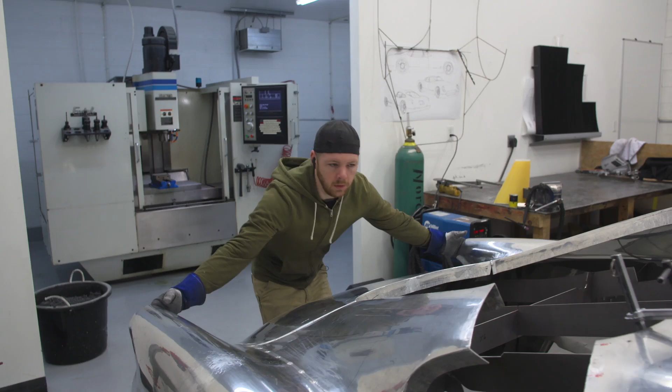Oh, this is heavier than I thought. Is this made out of aluminum? As soon as we're done with the car, we're gonna take it to Mars. Looks like you've been to Mars.

Putting in the transmission. Normally you'd think the transmission goes in the front, but this one goes in the back. Next level stuff, I have to change my hairstyle. Yeah, you might have to get a haircut.

Not so much telling the metal it's gonna move, as suggesting it move and it listening. Yeah, I like that. One more step closer to the ultimate car. Mind blown, 101. Wow, masterpiece.

This has been a dream well before I was in business. It's gonna take a team, everybody's expertise, everybody's input. These cars cannot be displayed, promoted, or seen by the public until they arrive at Detroit Autorama. There's only so many teams that have put these cars together, so it's a great, great, great opportunity. We'll build a car that nobody has ever seen before. The goal is to build a Ridler.

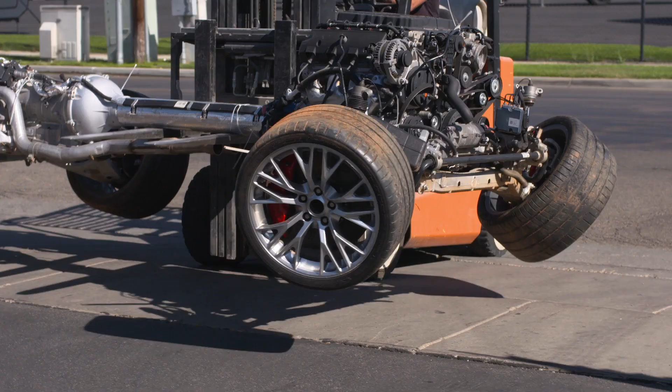Hell yeah! We're gonna use this transaxle out of this 2017 Corvette as the jump-off point for the transmission. Lots of amazing engineering in this deal. We don't really know what we're looking at yet.

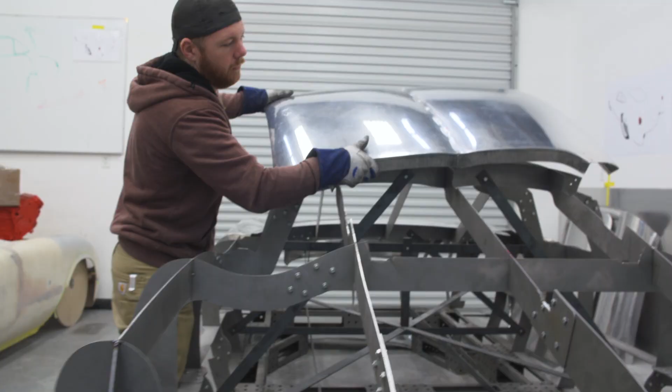You can see it's just a process. The shape will get there. It takes a minute, or an hour, or two. I don't know if I'm nervous, or just we're being overly cautious. I don't know, seems like that big irreversible step.

Fitting pretty decent, first two pieces tacked together. We're just gonna start standing things up and making our best shot of it, and we'll go from there.

This is kind of cool. It's really cool, isn't it? Uh-huh, it's like we're gonna go to Mars. Looks like you've been to Mars.

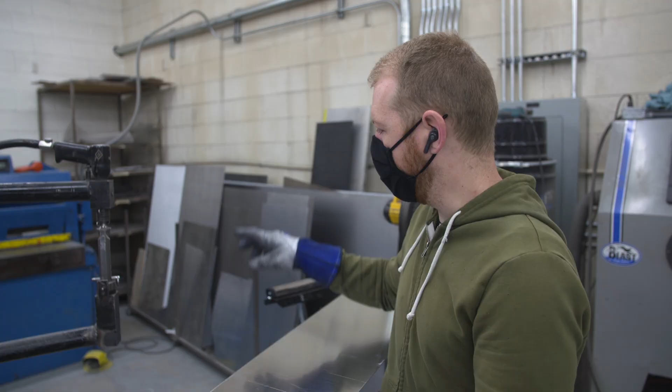This is the start of the rocker pieces. So I just need to get a general curve in the profile of it, and then I can start chasing tipping edges and defining door openings and stuff like that.

Rubber band on the top to try to make a soft upper wheel, so hopefully I can just kind of roll it through here and get the profile I'm after and not stretch it.

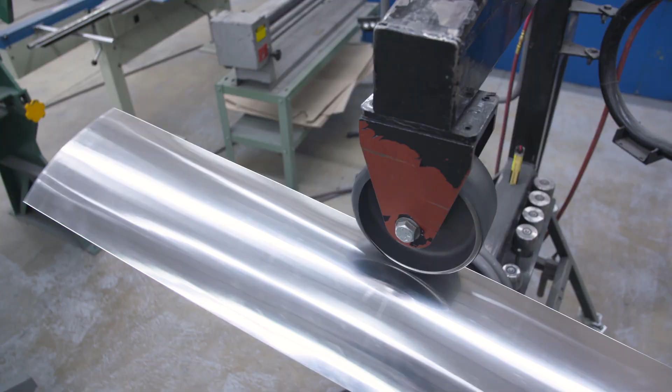I think it's the right profile. I just gotta make it do this number now, just ever so slightly.

The start of something good.

Seeing all three parts come together all at the same time, all on one table, is super exciting to me.

This is part of the floor. I'm gonna roll these edges up a little bit, get a nice half radius to meet up with the wheel tub so that everything will be nice and flowy.

Let's see if I can get it done in 2 passes. It might take a third.

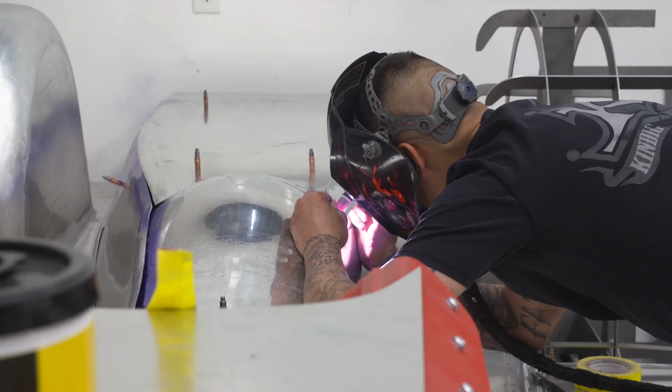We're getting the tunnel finally squared away on the rear. Eric's got the side pieces all dialed in, so I'm cutting them back and tacking them together so I get this all as one piece, and he's flowing all the floor into the front, so it's all coming together pretty good.

When we came down to the point where we were trying to join the lower panel, the lower skin with the body, and we didn't want things to move, it was a little bit of a quandary, like, how are we gonna get to this? How are we gonna do it?

Okay, ready? Yep, all right, heave ho. Oh, this is heavier than I thought. Is this made out of aluminum? Well, and it was a huge milestone because getting those 3 pieces together, I mean, it was a long road up to that point.

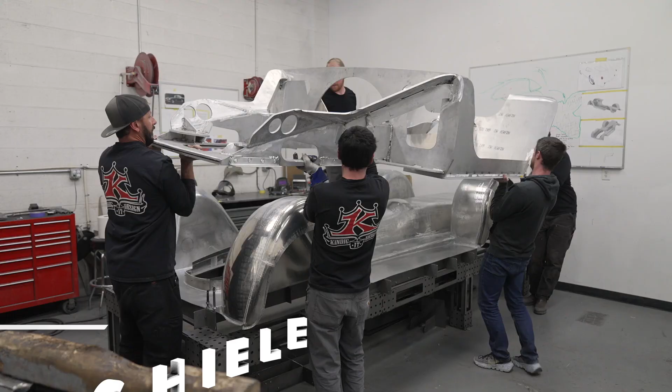I think you're gonna want to come up here, Max. Slowly, work quickly... better, don't catch your fingers. Good? Everyone clear? Good, good. Yeah, good, like a glove? It's glove, yeah, his glove like a glove. His glove was stuck underneath the... Is it just your glove? Okay.

Is the next one lighter or heavier? Way lighter, 'cause I'm spent, dude.

So that one will go on to the back, and then it kind of has to do this number. So like up high in the front, and then you'll set the back and we'll kind of bring it down? Yeah.

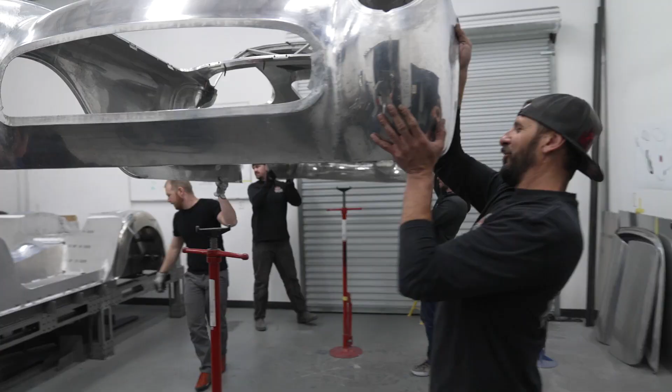Okay, there we go, oh yeah, that's way better. Okay, go slow so we don't crush Jordan. Oh yeah, I could hang out with this for a while. Okay, and then we got the back. We might have to spread its legs right here. Gotta spread the rockers, Greg.

We good? Yep. Sound first, that's good. Like a glove, bruh. Dude, that's amazing.

Yeah, look at this masterpiece. For the very first time, it's a car with a chassis on a floor. Can you believe that I thought this up and we made this?

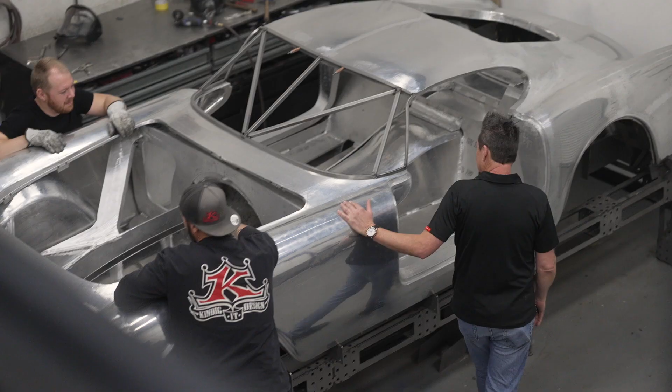You're just amazing. I was about to compliment you, but you beat me to it. Looks great, Jordan. Isn't it cool?

Yeah, this is awesome. It's funny to see this stuff going together over so much time, in big chunks, but when you see it all together, it's breathtaking, seeing the belly pan section, the structure going in the center of it, and then the body actually setting over the top of it.

Now I'm getting chills. Now I can start to really see the car come to life. You look over there, that's what this car started as - flat sheets. And now it's this beautiful masterpiece that I designed.

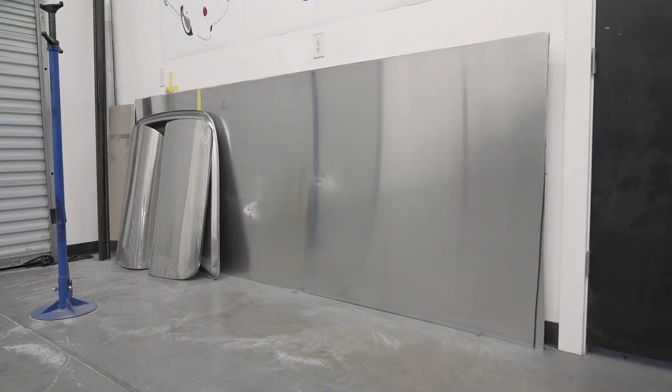Well done. Save your phone, the crap's getting deep in here. Now we have this body.

Right, it's beautiful, and it's a milestone, a huge achievement, but it's like, okay, we still have to figure out how the doors are gonna swing. How are they gonna latch? Is there anything else we're not thinking of before we weld the body to the floor itself?

The body is incredibly light and easy to put on. The frame is heavy, so I would rather him just weld it to the floor so I don't have to pick it up ever again.

The sooner we have the big chunks going together and they don't come back apart, that means we're getting closer to the finish line. I would really love to see this car debut when we're hoping. But I think you're doing great, I think this is awesome.

Like, this is exciting, I want to be in the moment and enjoy it, but it's like, okay, we still have to move on. And then it just opened up another list of all the other things we need to do to accomplish this. I'm gonna get out of your way, let's keep going, it looks amazing.

This car is 10 steps above anything we've ever built, period. Masterpiece.

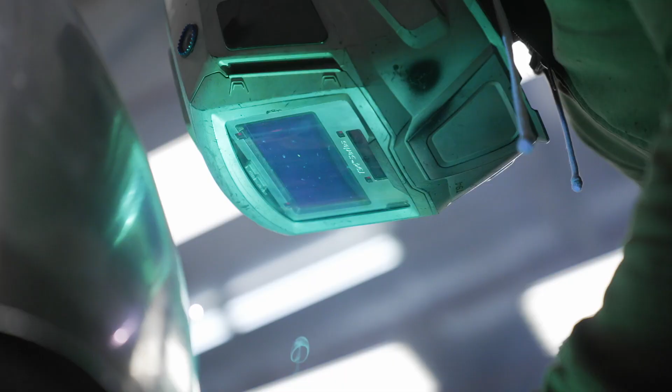We're welding the chassis to the floor. This will mostly be stitch welds, a little bit here and there. I don't want to do a good foot-long weld - it's just going to shrink all over the place if I do that. I'll try to make sure the tabs are very, very tight to the floor when I weld it.

This is the point of no return. No adjustment after this.

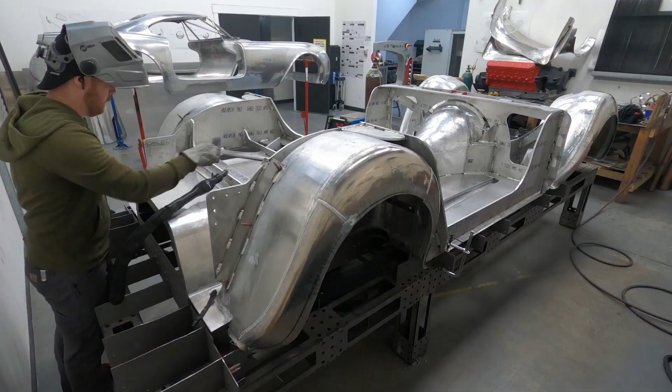So now that we have the floor and the body ready to attach, we don't have the real engine yet, because we have a printed version - it's custom. So you're thinking that's not going to come out the bottom? I'm hesitant, but we'll see. We have the mock-up plastic version, so we can build the whole engine bay out.

It has great fit on the computer. Yeah, it's gonna have to make sure we got real world space.

This will dictate what we're going to see in the future with the aluminum block. If this doesn't come out now, this will tell us, do we have to take the heads off to get it in and out?

Not only is it the engine, but it's the whole torque tube and the entire transmission - it's the entire drivetrain. The body was level, and it has to drop at such an angle that we have to take it out. All of a sudden, everything is going to have to be 10 foot off the ground, or we're going to have to lift the body this way so that we can get it apart.

I'm hoping it doesn't have to see that kind of angle, but it's going to have to see a bit. Okay, let's see. All right.

It's going to be really easy with this plastic one. I don't think I'm going to be able to bench press the aluminum block in no time. We'll get under there, get ready to catch it. I'll catch it with my face.

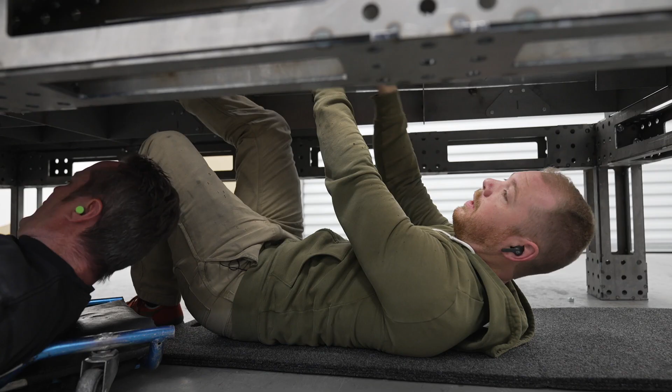You want me to knock that bolt out? Got it? Got it. Okay, there's the passenger side one. Alrighty, let's see.

We'll get under there, get ready to catch it. I'll catch it with my face. Alrighty, let's see.

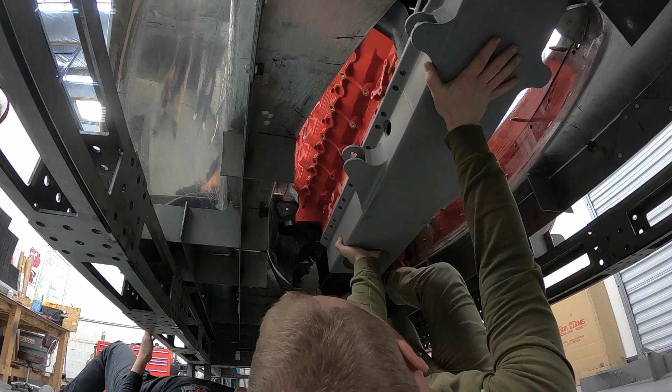It's mainly this valve cover. All right, go take the valve covers off. So far we have to take the valve covers off, which is easy, that's not a problem. What about the other side?

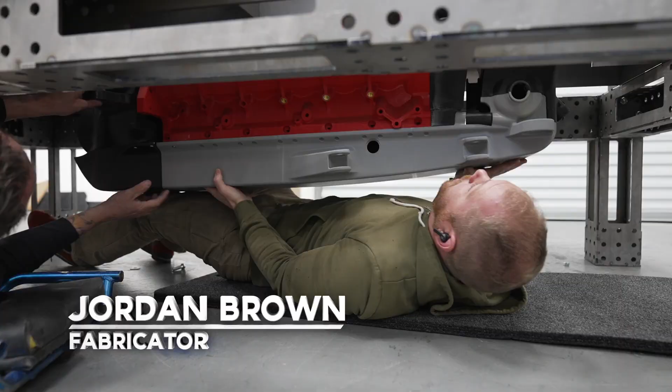No, okay, coming down. Yeah, see, all the rest of it's fine. That wasn't bad. Set it back up in there like it's going back in. What angle do we have to get to? It didn't seem that extreme, really.

Okay, right there, about that angle, which is pretty decent, like 20 degrees, it's definitely doable on a lift with something that we can adjust the angle of the trans drivetrain. Jacks will be really helpful. The torque tube and the bell housing, all that stuff's going to already be attached to the engine.

So where you're trying to go in at an angle, you're not going in from the top like a regular engine would be. No, you're going to basically go from the bottom. Okay, want me to hand it to you? I don't know that it'll tilt enough.

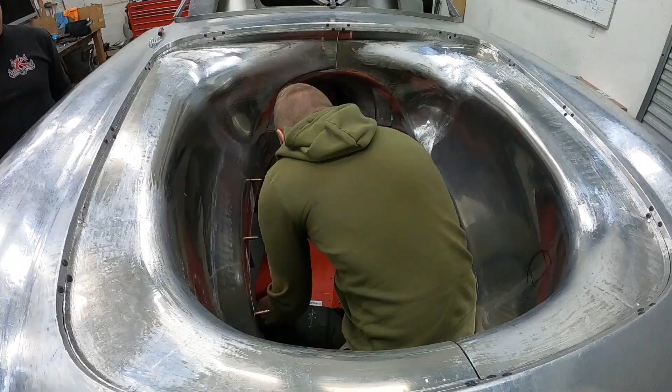We've done all the math, and it really should be simple. It's gonna be simple, stay tuned. Yeah, it ain't gonna come out this way. It's taller than our 18-inch stands.

There you go, you're gonna have to be way more careful with Dave's paint, you know that. Stupid paint, let's polish it.

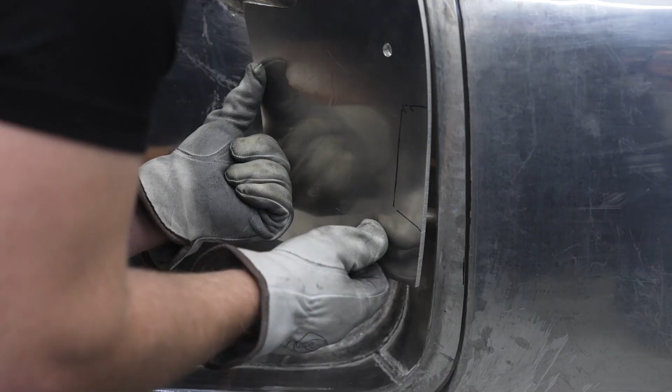We're taking the door off so we can clearance the front edge of the door shell and then get it swinging. Proof of concept, we like where the hinge is. I've had a lot of ideas, not just using a standard door hinge, but designing a constant radius and a very small porthole where it comes in and out of the body, so that's trick. This is the structure for mounting the door hinge to the rest of the shell.

Once this guy is tacked onto the shell, we can swing the whole thing as if the actual door was here. All right, moment of truth. Hopefully that's enough clearance, if not we'll find out shortly.

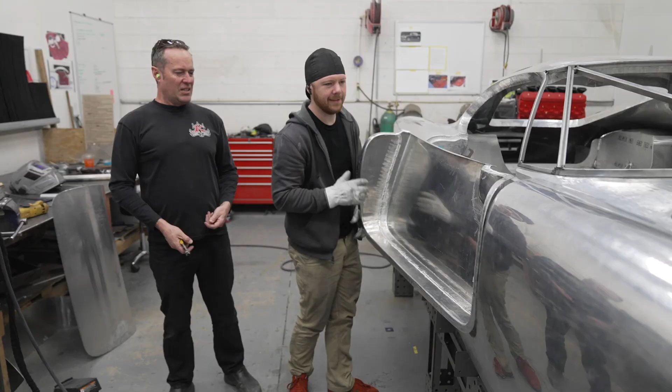Hey, that's pretty cool, it is cool. How much does it clear there, though? That clears by a lot. Just for giggles.

Look at that, that's cool. Open it again. Yeah, there's plenty of room. By doing a chromed constant radius, where that thing's just disappearing into the body, it comes and goes, and then you have that slider. I think it's gonna be really, really trick with the neoprene on it. Yeah, you just can't see past it.

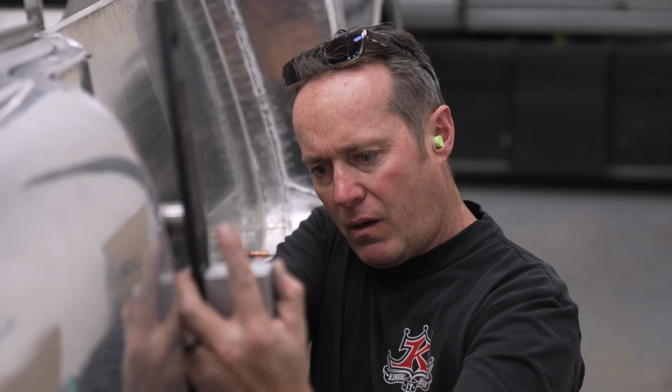Well, I say we mock it up with this as a spacer in there. Then if we have to, we're just shimming or whatever, a little bit of adjustment. Yep.

Not just using a standard door hinge, you know, going and designing a constant radius and a very small porthole where it comes in and out of the body, so that's trick. Makes the most sense for a show car. It is the cleanest, period.

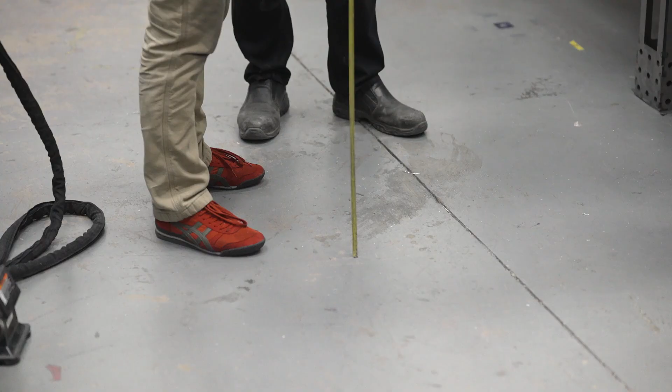57 3/8. I think this side's up higher. 58, the ground's not level, you know? I think we need to change the pivot angle a little bit.

Weld one washer on here, and then refit this guy to totally flush and retack it. The hope is that we're happy in the closed position and symmetric in the open position. We'll see if the laser agrees that we're same height. Yeah, this looks pretty good side to side now. Exactly like we want it.

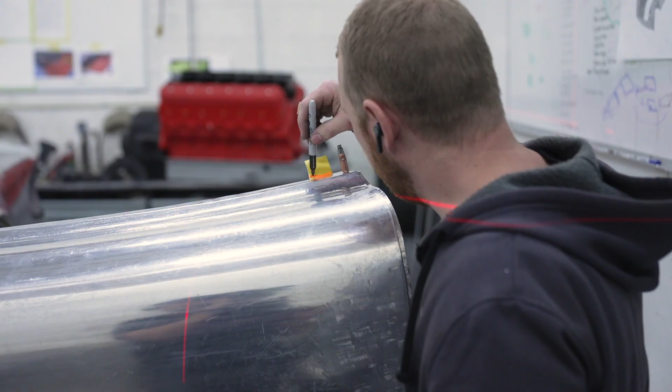How goes it, Jordan? Oh yeah, nice, it's going. Sweet, here, let me get this for you. Oh, you want me to get in? No, I just want you to look at it. No, get in, I want to get in.

Good, I think that the team is doing very well. I'm very excited to come to work every single day, and I'm even more excited to see more parts go on this car. Hey, this is actually really nice. Yeah, it's not too bad, huh? I don't feel like I'm eating the car or wearing it.

I think we have the pedal position locked down pretty good. I guess what should be decided is where to put the steering wheel position, and then does that feel comfortable for the center shifter and everything right there? Yeah, I have to change my hairstyle a little bit. You might have to get a haircut. Yeah, this is comfortable, it's very comfortable. But I think that the seat, because the transaxle's right here, bell housing is...

I think we might have to get a little creative with the seat. Next thing would be, I guess, build a wireframe of the dash itself. I want this very low and dramatic, long sweep. I want these built up, almost like a cartoon version of an original 53 dash.

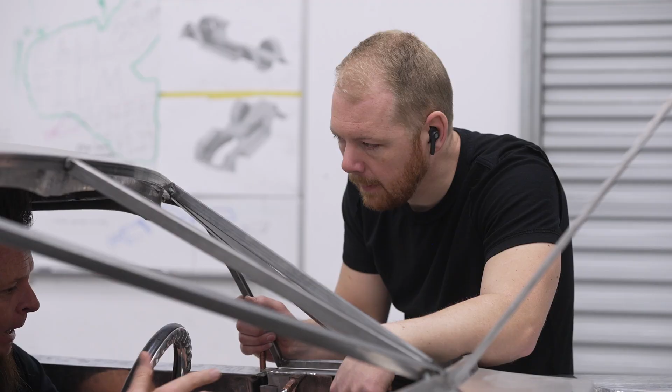Oversized, big time. I want them laid back. I want the face of the gauges laid back a little bit further. Very elegant. I want this just to have a nice flow, real low, so it feels like when that shifter's there, that's the business spot.

Shouldn't be a problem with that. No window switches. This is gonna get exciting because now the next step really is gonna be welding it all together. Yeah, I'm pumped.

Here, hold. Oh, let me take your wheel. Hey, you wanna valet my car? Custom key. Right.

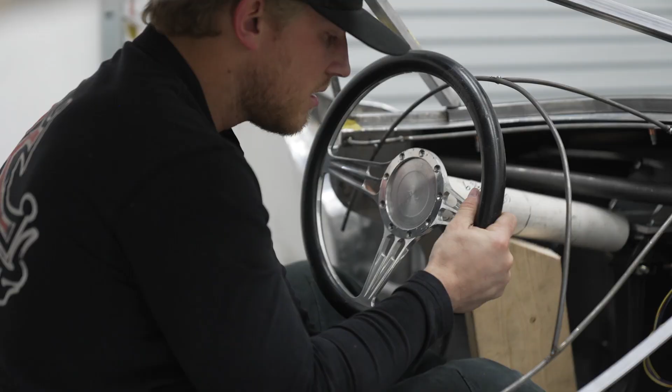I'm taking this quarter round and creating just a wireframe of the most important points in the dash. So we have the center console here, trying to figure out how wide we're gonna have it, how much slope it's gonna need. The real challenge is taking Dave's drawing and turning it into reality. But sometimes things in your imagination just don't actually work in the real space.

Ultimately, there's a couple important things that we have to work around that are non-negotiable, you know? Steering wheel location, space for hands, all that sort of thing. And then the rest of the aesthetic stuff, that's really where you kind of make compromises.

Well, don't let Dave hear me say that. That's not really true, but it is true.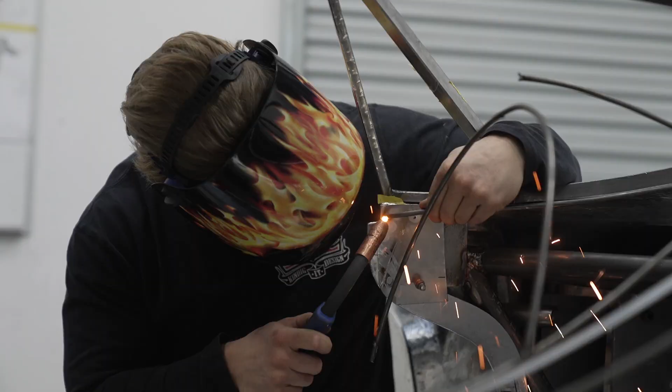If we think too far ahead into the pretty side of it, and you just neglect the ergonomics of it and where your shifter needs to be, it ends up feeling super awkward.

I think we have a lot of space. I was afraid this was gonna feel super high, like it was in your face, but it feels really good actually. Gives you perfect clearance through here to actually see the gauges, so your steering wheel's not right in your eye line. We also have it to where the steering wheel's just maybe a quarter inch or so, half inch below the top of this surface. So it all just kind of lines up nicely with your eyes. You can still see the hood.

And once we scan this, then it'll all be in the computer and we can reference it whenever we need. That could totally work. Yeah, I like that.

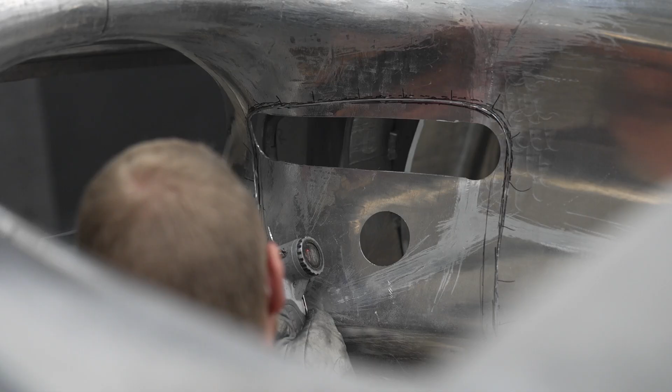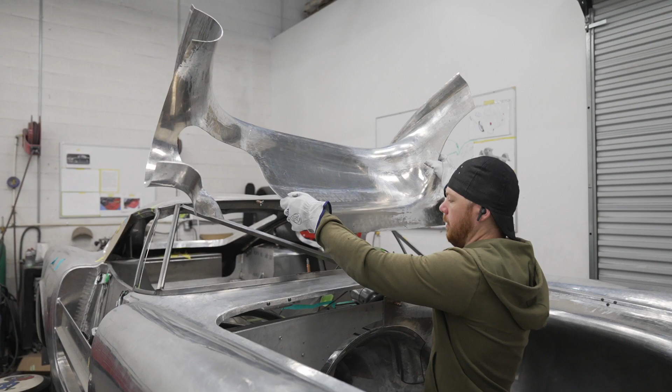I got a hole. This opening will allow the suspension to travel from the engine bay to the wheel. It'll be one big hole instead of three weird shaped small holes. This will allow things to be able to assemble a lot easier and be able to clean and access. Weird shaped hole though, look at this. That's the profile of this inner skin through that hole.

Next step is I gotta finish welding this thing up and make sure it fits exactly how I want, and then trim this opening back a little bit. This will be a much more functional hole, and pretty neat hole, I guess. I don't know, as holes go. All right, fits.

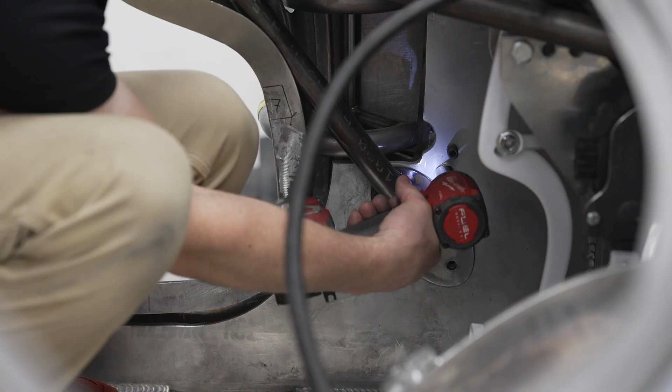Finally got everything about put together, and so let's take it apart. To put the floor and the body together, everything had to be checked off.

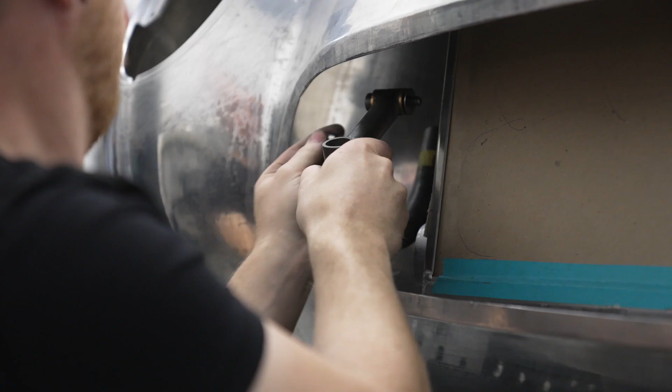That's right, 'cause it includes the engine bay. The engine bay, that's the radiator mount. I have to finish welding and smoothing a few things on the floor and the underside of the body that I cannot do with it together. Water pump. It's the other side.

Pretty, huh? So we have to divorce the two and then finish all that stuff up. Stuff like the tail light, I need to be able to get to the back side of it, weld it, hammer it out, and then smooth it off. And then think about anything else that we're gonna regret not doing while it's off, and then weld the engine bay to the body, and then the body to the floor.

This would be kind of a momentous occasion. As you can see, I'm celebrating by myself again.

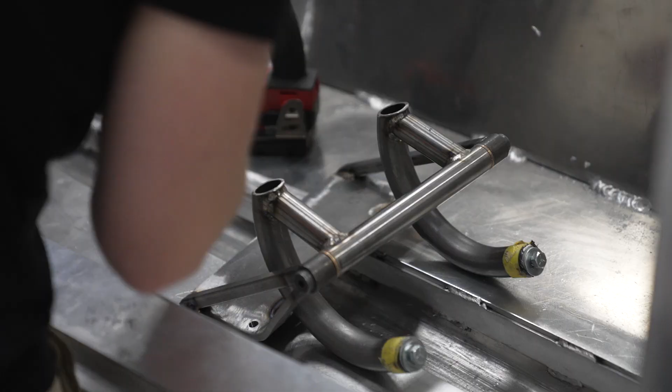Think they'll be able to do that without scratching it in final assembly? We should be considering stuff like that, like order of operations and can stuff go together well post-paint. But at the end of the day, there's so much we can do. There's some things that are just, even at this point, we're like, sorry, it's a Ridler, so it has to be a riddle, put it back together.

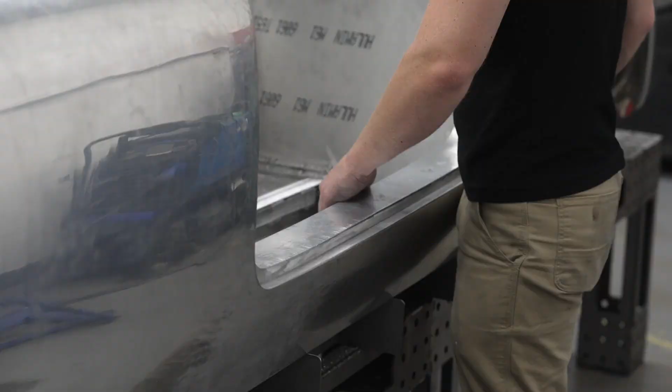I think it's loose. The big question is gonna be, can this all come out with the engine bay panels still in place? Because I need to weld those in, and then it's gonna have to come back on in this direction, so it's kind of important that it comes out with that stuff on it. Hopefully it works out where we can just bloop, bloop, bloop.

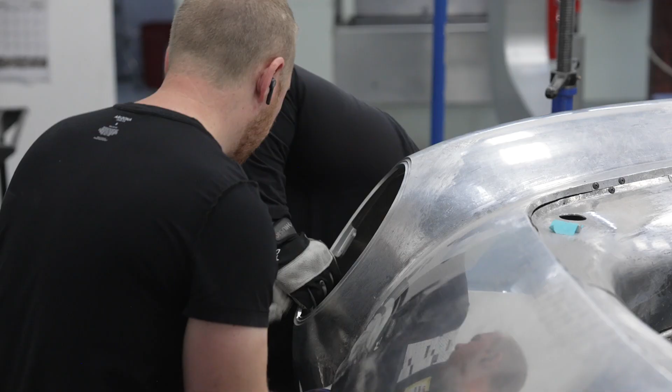Nice. So, where's the light side? It's all terrible. It only has to happen once. If it bends a little, that's okay. What is it caught on here?

Okay, so forward. Ta-da! Okay. Run the wheel arch. Yeah, in the wheel arch.

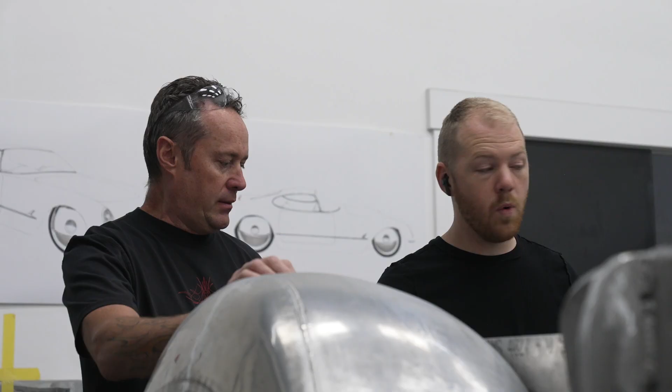Thank you, guys. Now that we have twice as much room as before, we can get to the other stuff. I'll grab you in another 7 weeks when it's time to go back on. 7 weeks? 7 days? 7 hours. I think it's lunchtime.

Moment of truth. I'll probably add a little bit of filler in a couple small spots where it's cratered a touch, but not a lot.

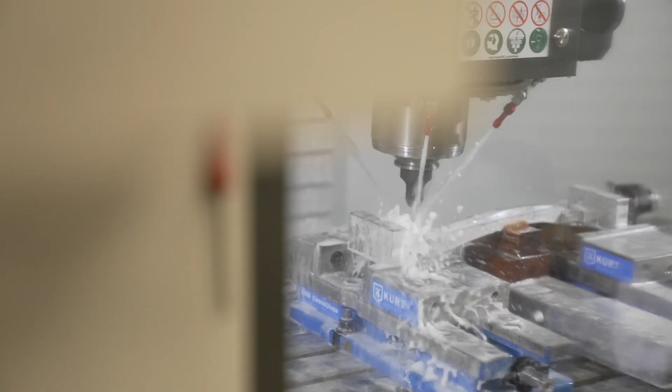I wanted to show you the windshield. We've gone over the design quite a bit, and we've made sure we got all of the style cues you're looking for. We finalized the frame design and we're in the process of machining it now.

Visually on this car, I want to make sure that we have the chrome on the outside of the windshield, but I also want chrome on the inside of the windshield and around the window treatments, to basically give you that feel of a classic car.

Because it's a two-piece frame, we basically overlap the seams. So when we go to put it together, the whole thing will just align itself. So you have an inner frame and an outer frame.

We're gonna do 9 inner, 9 outer, just flipped. It's going to be a little bit more difficult because I really want the glass, the chrome, and the paint to all just flow as one, with no light bend.

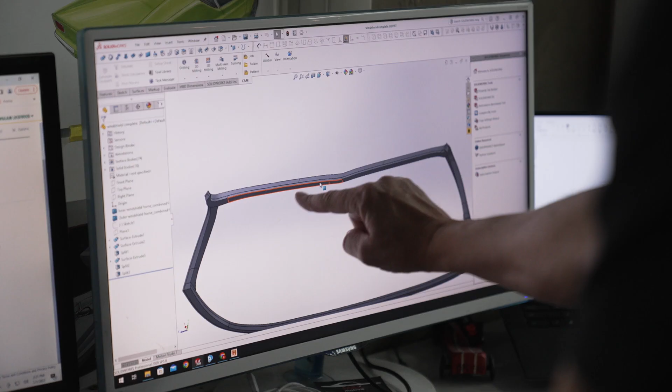This is the piece right here that I'm machining. You can see it in the assembly of the windshield. All of these little lines are breaking up the individual pieces that will actually weld together. That's what's going to be so cool about it.

I don't want a blacked out frame. No blackout frame, no step up to the glass, no weather stripping. It's literally just going to look like a flat sheet. That's awesome.

I'd like to see some of the stuff that you've got cut already. Let's do it. Cool.

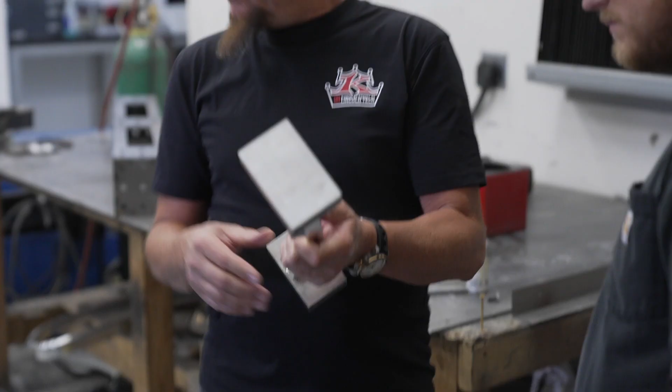This is one of our A-pillars. This is an interior piece, and it will have all of the strength to create... this is the strength of the A-pillar. It's going to tie to the roll cage up top.

And the frame down low. I don't know exactly how we can do it, but I think maybe we can trap the glass between the two pieces, or come up with a way to router it. Those are the two side pieces that'll go up on the front of the dash. Next level, I'm stoked on that.

In the past, if we were trying to do this without these machines, we literally would have been grinding this stuff by hand out of stock material. I can't imagine making a seamless windshield like this using old methods. No.

Yo, Howard, you want to do some lifts? Yo, Eric, can I borrow you? Yo, Mad Max, Steve, come give us a hand, will you?

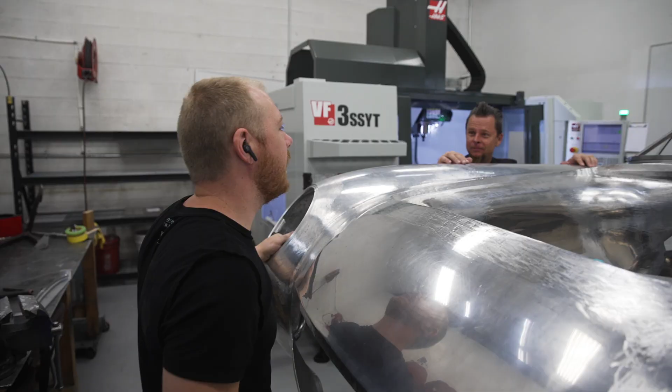We really had to make sure this thing was checked off, because once we weld it together there ain't no coming back. Plop it on for the last time and weld it up. On for good? Hopefully, that's the dream. I've been dreaming about it for quite some time.

I think this will be awesome. Well, fingers crossed, lick it and stick it. Potentially super exciting. 1, 2, 3, go.

Okay, hold on, we're going to move off the wall just a little bit. Groovy, okay, flare the sides out just a little bit. I think we're held up just a little bit right here in the wheel well. Almost there, just one more. Hold on, finesse.

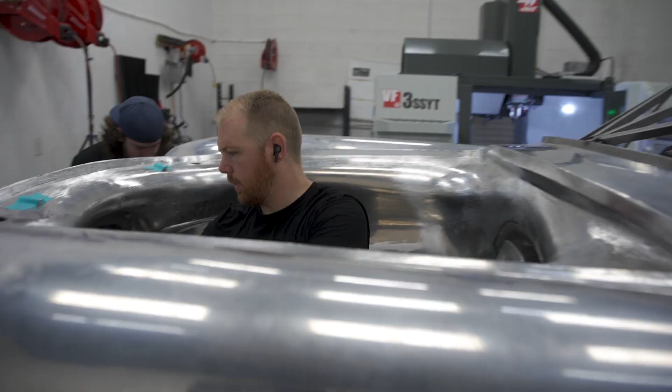Yay! Engine bay is in place. Pretty slick, looks like it fell right into place. Cool, guys, I think we're in. Sweet, thanks for your help, fellas. Woohoo! Yeah, I think we're winning now.

I think so. Next big exciting moment is when we get it on the ground, eh? When's that? Soon. Close the back cave down, we'll get back to work.

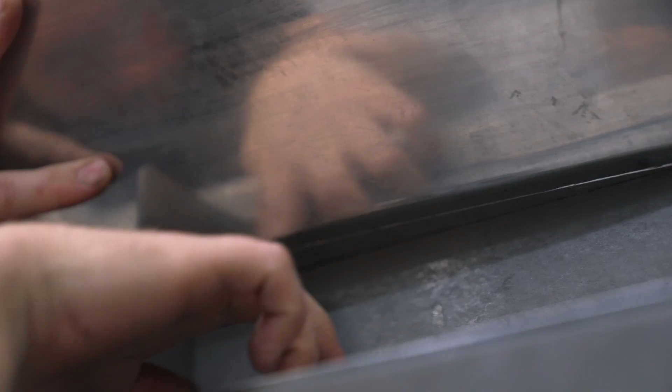This seam right here, push up on it like that, and get right in there. Once this thing's welded together, it's done. This guy's bent down just a tiny bit, so I gotta smack that back up flat.

Just trying to cross all the T's and make sure that we're right there. Yeah, we should do it soon, right, because Dave Kindig has asked me to weld the body together about 13 million times.

I thought you were gonna have that going in today. Yeah, in the last 2 hours. This is a pretty monumental step, pretty big. We've been waiting quite a while to make sure everything was done before these two actually get married. Once this is all stuck together, then we can really start moving forward on finishing items, and there's no going back. So hopefully we've thought of everything.

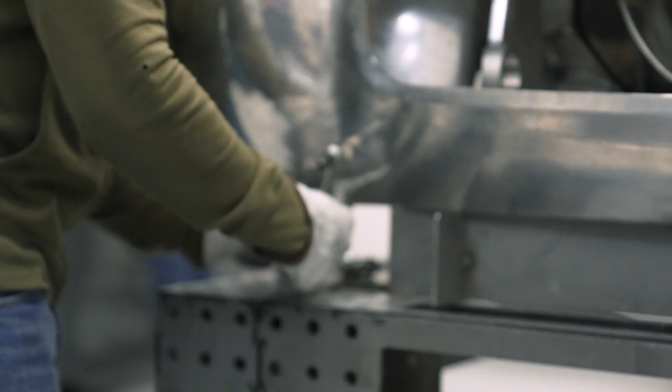I tried to make it so that everywhere it welds together has a backing plate, so that it's not welding to just one layer thick. It has something to stop the weld.

I'm not always cold when I put on a sweater. This MIG aluminum kicks off a lot of radiation, so if you're not fully covered, you're gonna get a pretty gnarly sunburn. And I kind of hate sunburns, so I'll sweat for a little while to save me sweating with a sunburn later.

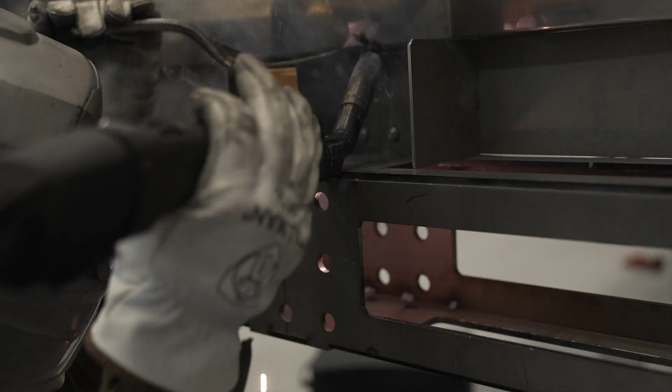Hard to see in there. Tack welds hold everything in place in the position that I want it, without doing a full weld that's gonna start warping things. If you just have two pieces together and start welding the full seam, the heat's gonna make it distort, and you're not gonna be able to get the weld that you want.

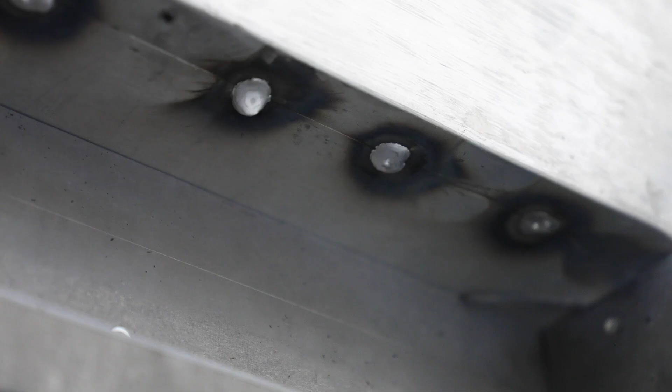What happened? This tack is filling up a gap that needs to exist.

This jacket's very special to me. They get worn pretty good. A lot of the holes are from spatter, and this is just aluminum spatter, so this isn't even crazy gnarly MIG steel spatter, but it's beat. It's done.

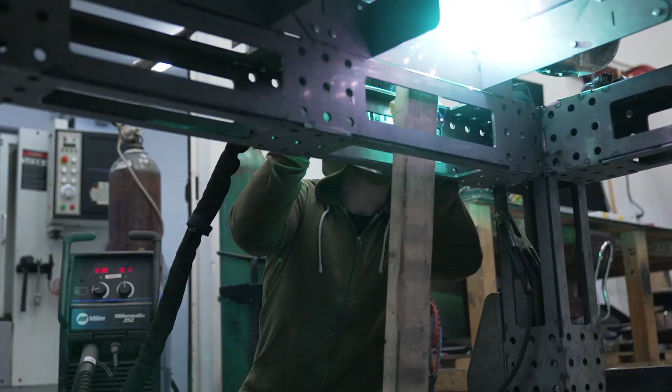The front's all tacked together, and it's all sitting level and all the seams are nice and flush together. I'm pretty happy with it so far.

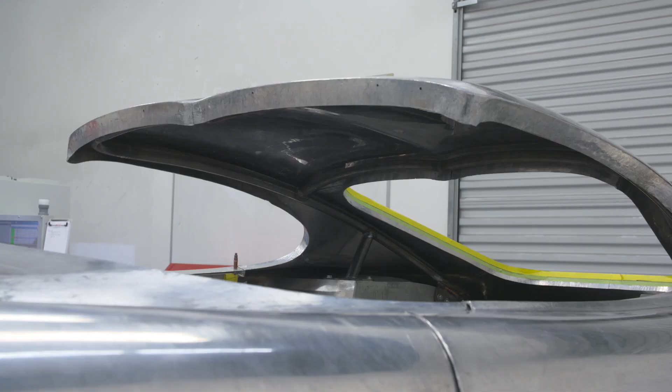These are all the pieces that Greg and Brax have machined for the windshield frame. This is the main frame itself that the glass will sit on, and then this is the trim frame that will sandwich the glass. This is a lot of pieces. If we had a really, really big billet, we could have done that out of one piece, but that would have been really, really expensive.

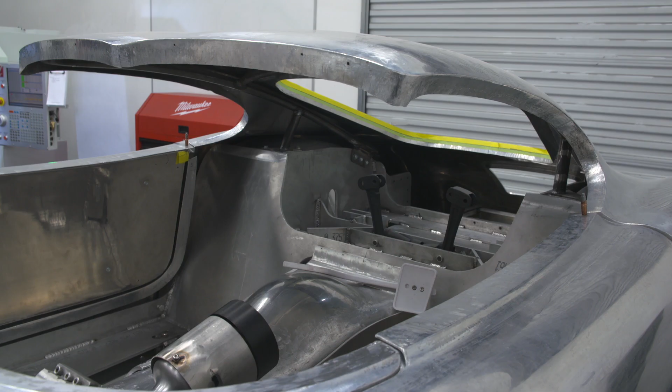The hard part about this will be making sure everything's aligned, and then it's gonna plop right on the car. Luckily, they've designed these where all this stuff overlaps, so these two pieces will fit together like that. So if I can get that lined up really well, these will line up really well. It should be pretty much dead on, and it's gonna work perfectly the first try.

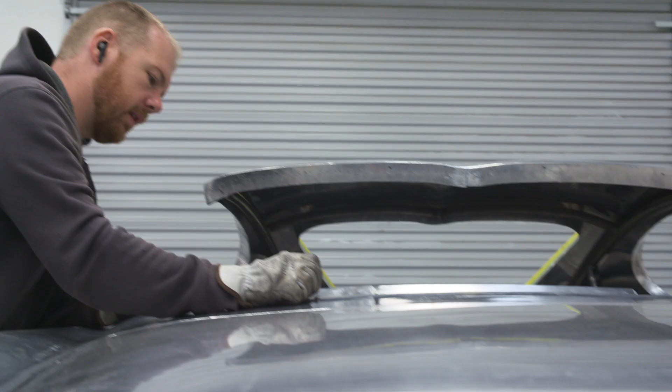Maybe that's close enough, I don't know. I don't love it.

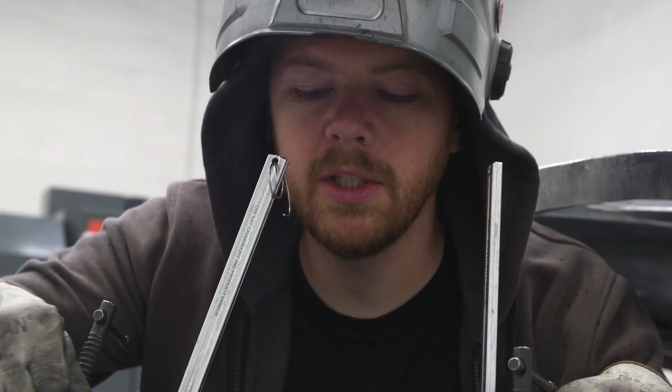So far, so very good. Much better than it was.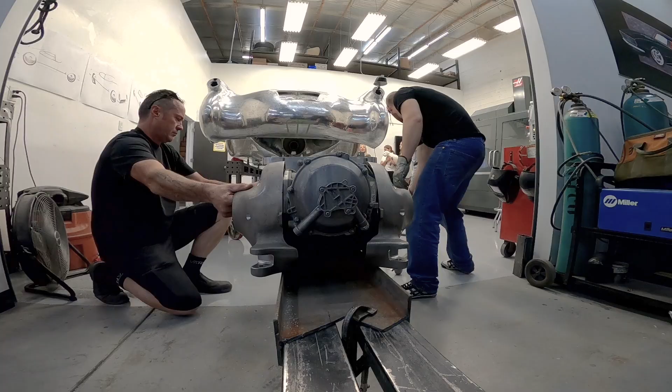Put in the transmission. Normally you guys think the transmission goes in the front, but this one goes in the back.

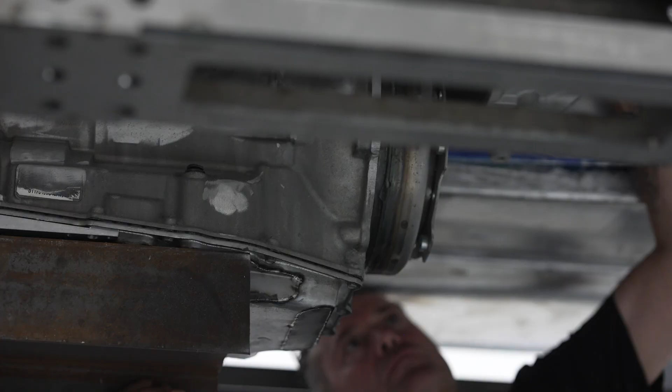Okay, bring it on up. About a foot. Tilt back just a hair. Up another 2 inches. Just ever so slightly forward. Okay, stop. Okay, that's good.

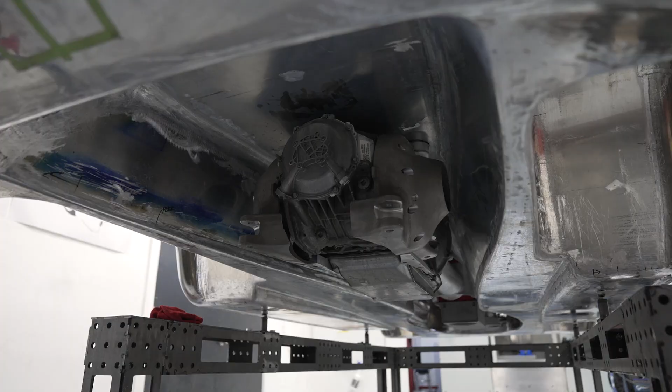Blammo, nice. Yeah, it's good. You can let this down and get the forklift out, Kev. Success. One more step closer to the ultimate car.

Oh great, I gotta cut the body. Cut a path. Yeah.

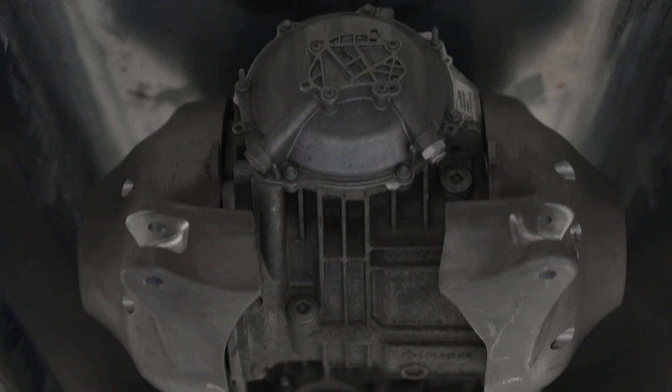This is our mock-up of our control arms, printed. And now that we have our side bells on the transmission, that provides the lower mount for our lower control arm. Then this shape right here, this taper, once this bottom of the car is cut away, this surface will live right there. All your handmade body work with our computer-generated dreams, and then it's just gonna be everything else.

Okay, I'm getting out of your way because I just want you to cut the big hole in there. Okay.

We should be able to test fit this side now. There we go. Blammo.

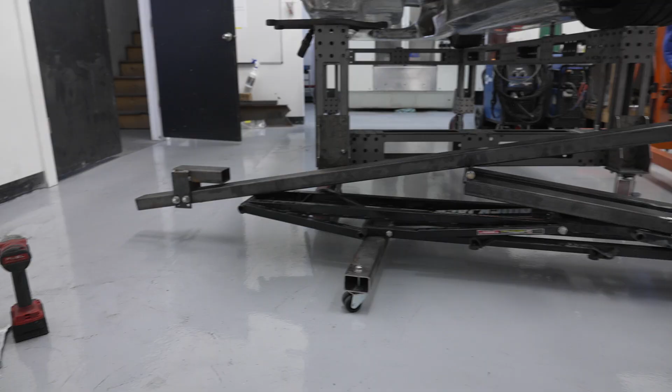So now that we've got all of the actual components, how do you guys plan on getting that into the car? We're gonna have to build a contraption, for lack of a better word. The front engine mount, drivetrain mount, sits on top of the chassis. Frax has gone through and made a stand that will pivot so we can get the whole engine and drivetrain scooted under the car and up to the car in one fell swoop, and hopefully it all works perfectly.

Well, so not only do you want to have it in for Dave, but I think we want to see if it'll actually fit. I don't think anybody sitting at this table is 100% positive that it will go in the car. Engine and torque tube coming up.

Torque tubes are used on Corvettes from 97 and up. That's so you can mount the transmission in the rear. The torque tube makes the drivetrain one solid unit from the transmission all the way to the engine, with the drive shaft going through there, spinning at engine speed. The cool thing about this setup is it allows the transmission to be in the rear, which gives you a better weight distribution, so it's better for performance driving.

It's a big milestone for us. It's gonna be a first for the whole suspension, engine, drivetrain, all of it in the car. It's going to be a first for mankind. Yeah, basically.

1, 2, 3, grunt. Okay, down.

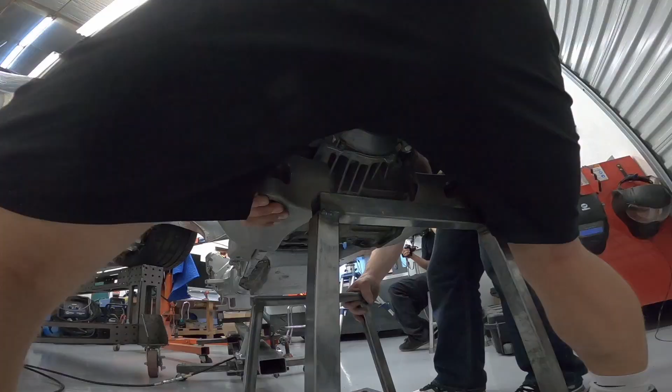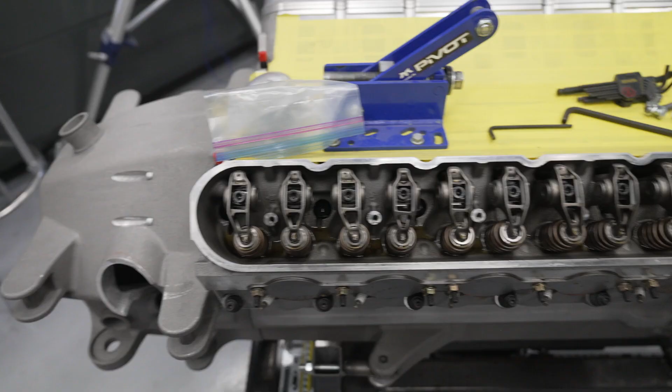It's such a tight squeeze up in this engine bay that we actually have to pop the valve covers off and take the intake off. We'll get it down to just basically naked long blocks, then stick it up in there and dress it in the car. Makes it a heck of a lot easier getting it in and out without scratching stuff.

How close is the snout to the cross member? A good 1.5 feet. Yeah, keep coming forward. Okay, you ready? Oh, there it goes. Good to it. We're rearranging these braces so that we can actually slip the engine in place. All right, there we go. I think that's it.

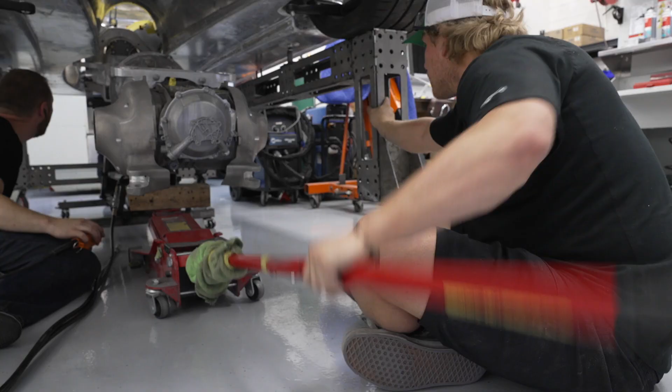Car back, engine forward. Seems like it's easier to push the car, right? Yeah, because we're just really close to the heads on that trans mount. We'll go up, okay, touching, back with the car, forward with the unit. I'm gonna start to lift the rear end a little. Right there is about as far as we can go. If we go up, can we go a little more forward, Will? No, this is gonna be really hard painted. Holy smokes.

Yeah, I'm gonna start to lift the rear end a little. Right there is about as far as we can go. If we go up, can we go a little more forward, Will? No, this is gonna be really hard painted. Holy smokes.

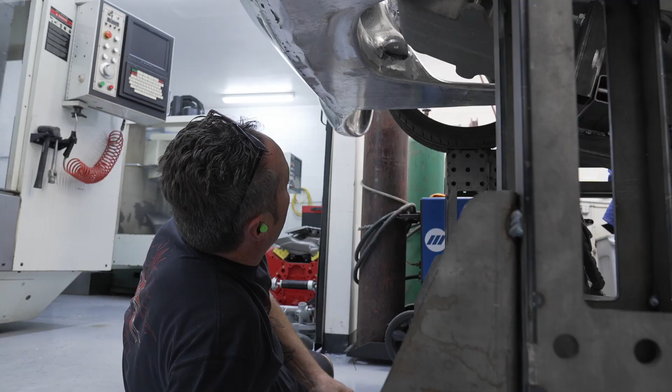My concern with this whole deal is it's the first time. It works in math world, but I don't like this with our $100,000 drivetrain unit. We're just really close to the heads on that trans mount. We need more tilt. Let's see if it's available.

Whoa, the heads are so close to the back. We're stuck on the fixture. Right there is about as far as we can go. Are we hitting stuff up there? Yeah. It's very tight on the back on the passenger side. I don't wanna disassemble it. I mean, we're talking like this close.

Honestly, it may be smart on final assembly to just assemble the heads off the car. I know we're gonna have to take the valve covers off. It's gonna be tight, and then we'll see.

We're kind of up against the timeline a little bit. Dave wants to see the car, and we all want to see the car at a certain level here real soon. So let's bring it home.

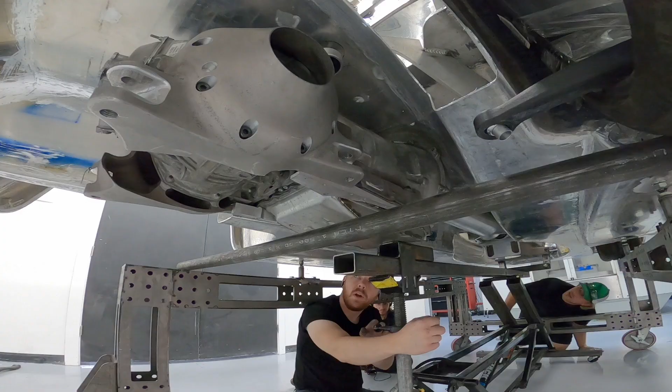Okay, nuts on. Oh, look how beautifully that fits. Yeah, I like it. There we go.

With Dave Maxwell coming out to see the progress on the car, I would really like to see as much together as we can so he gets an idea of where we're at in the build process.

What I'm here to see is the special build, to win the award, the best award. It's like going to the Academy Awards. I know a little bit about it, seen some renderings of it, but I'm very anxious to see it in person. There's been so much pressure on all of us to really try and push the envelope and create something that's super awesome. And the proof is in the pudding.

Oh, come on in. Mind blown, 101. Oh, wow, that is incredible.

What we're looking at here, obviously, is a one-of-one body. Is it a V6 or? It's a V6 twin turbo. Ford, we put a Ford in there. Four-banger. That is incredible. We're gonna put it on the rotisserie, then get some paint on it.

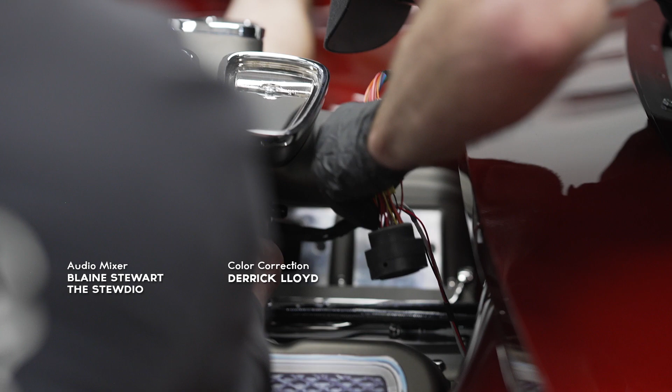Kind of the consensus is we need to do something that makes it kind of jump a little bit, so we're gonna switch the colors. I think that's a winner, guys. Let's do it. Hang on a second, isn't Will gonna lose his mind if these wires are still colored underneath the intake?

Hey, huge deal for this project, huge deal for the shop. This is big time. Might just have to look at it on the car and see if we like it. Hold on, stop one second. I just heard a bonk.